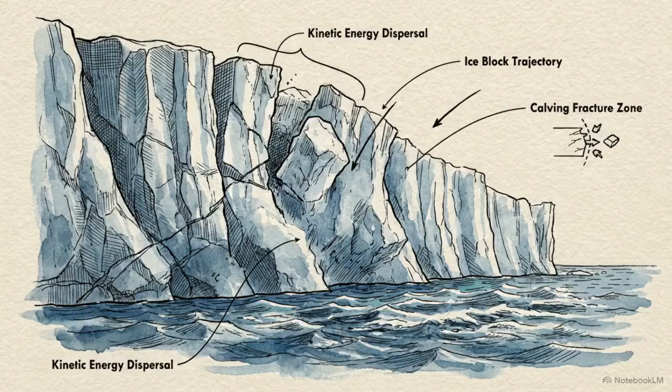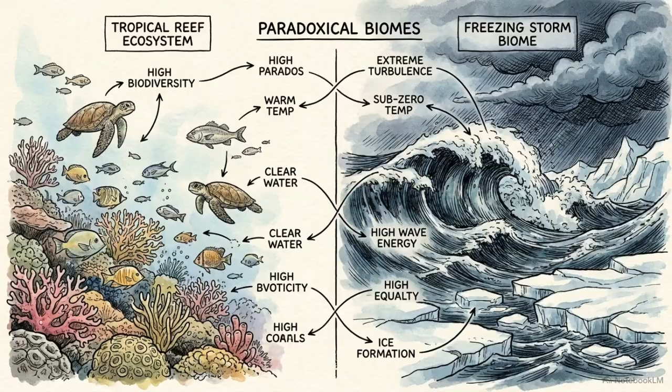The United Nations has laid out two massive scientific mandates: the Decade of Ocean Science and the Decade of Action for Cryospheric Sciences. Achieving these global goals presents a significant physical paradox.

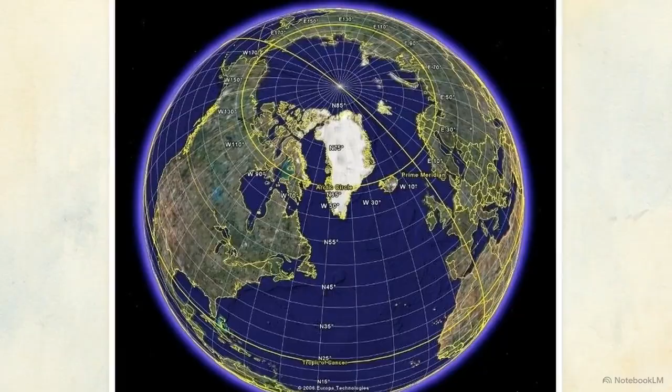To protect the Earth's most critical ecosystems, humans have to act in environments where survival is virtually impossible. We have to collect data beneath miles of polar sea ice, intervene in deep water high current zones, and maintain remote offshore energy sites. Because we cannot send humans into these extremes, we rely on marine robotics, remotely operated vehicles, and autonomous floats to act as our physical proxies.

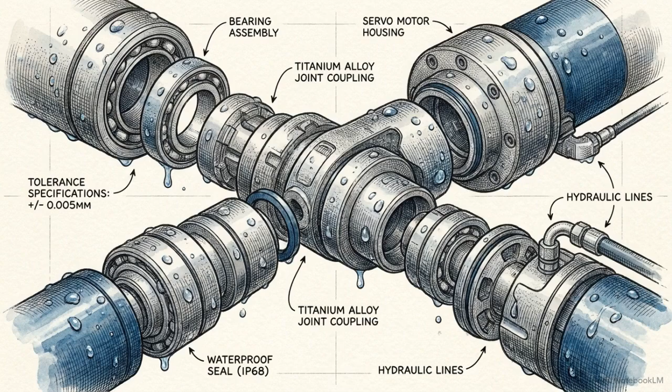To understand how this translation from policy to hardware occurs, we can look at the request for proposals issued for the 2026 MATE ROV Ranger competition. We are going to deconstruct how macro-level UN directives are broken down into four specific, localized engineering constraints. The survival of these mandates rests on hyper-specific mechanical and systems engineering solutions.

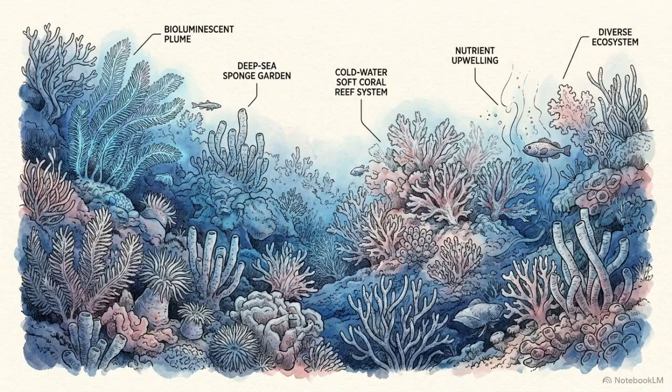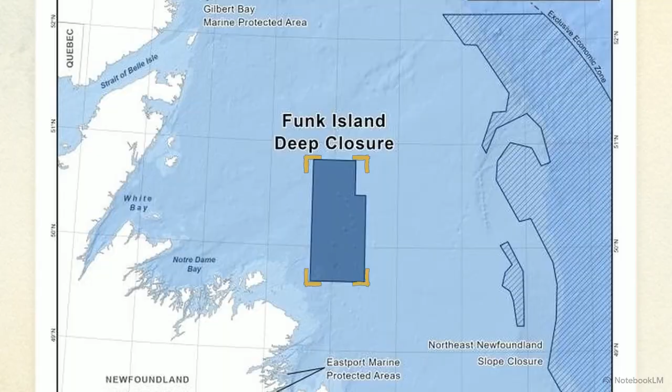The first major UN objective is to protect deep-sea biodiversity and restore delicate marine ecosystems. This chart shows the Funk Island Deep Marine Refuge, located off the eastern coast of Newfoundland. This is a primary testing ground for these observation efforts. Recently, researchers operating in this sector discovered a densely populated, rare, cold-water soft coral garden.

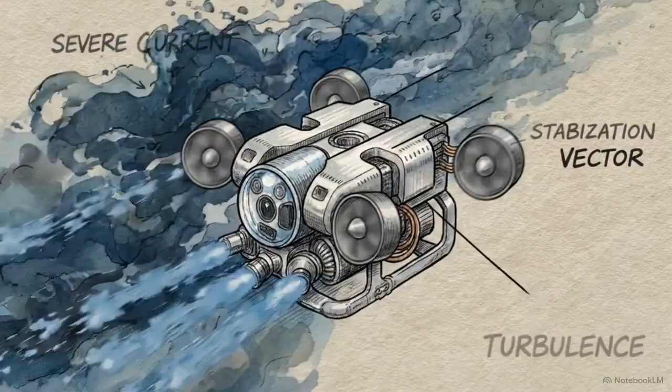To document a habitat like this without physically destroying it, an ROV must carefully operate inside the severe, sweeping currents that naturally run along the seafloor ridge. The mission demands the ROV use a specific data acquisition method known as photogrammetry.

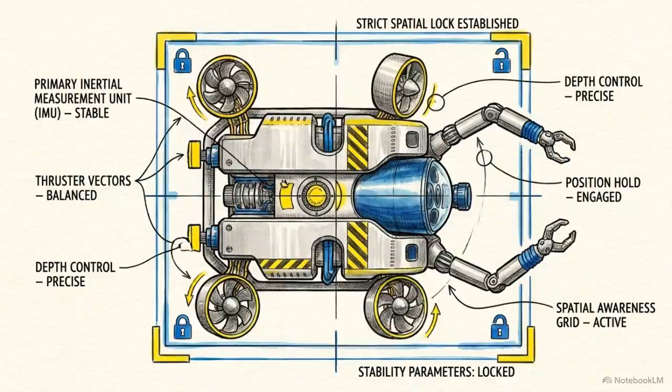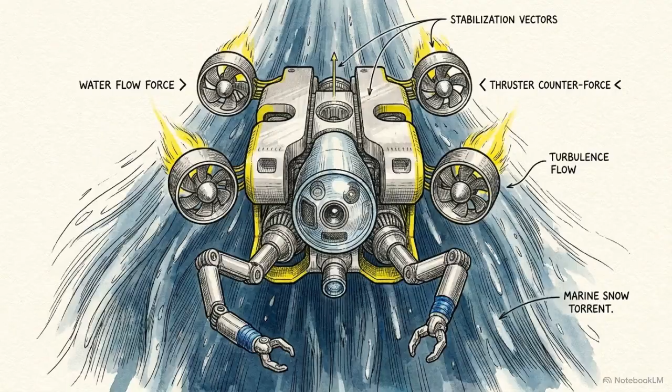By systematically capturing overlapping two-dimensional photographs, the ROV provides the exact data points required for software to stitch together an accurate, measurable three-dimensional topographic model. To execute this, the ROV pilot must maintain strict spatial awareness, holding precise vehicle positioning and flying linear transects directly against the water flow. Mapping these gardens in three dimensions requires robotic platforms stable enough to operate in heavy flow, turning discovery into measurable, long-term monitoring data.

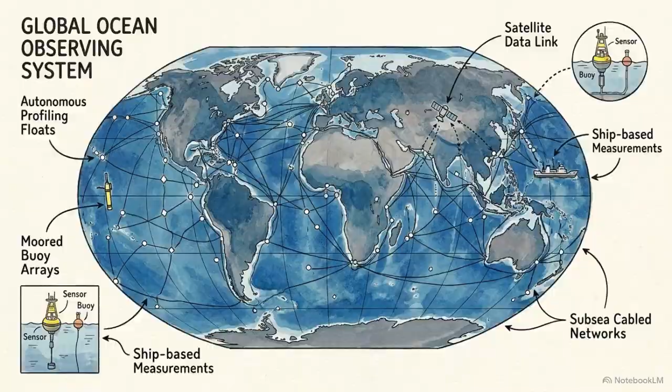The next UN objective mandates the expansion of the Global Ocean Observing System through persistent coastal monitoring initiatives. We can see this in action through the Smart Atlantic Alliance, specifically their subsea observatory linked via fiber optic cable near the Holyrood Marine Base.

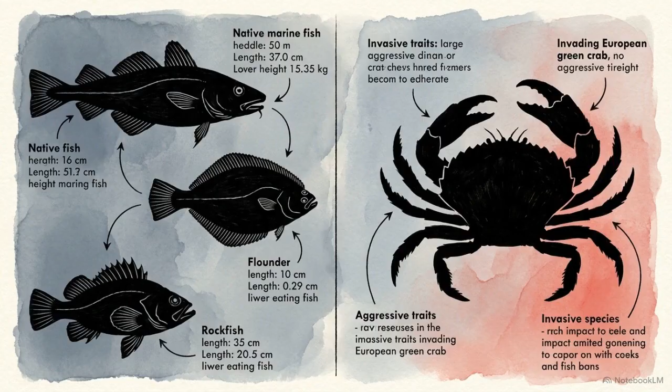One of the immediate biological challenges in this observation sector is tracking invasive species, like the European green crab, without having to rely on physical capture traps. The hardware solution the ROV must deploy is an environmental DNA, or eDNA sensor, which sequences cellular fragments shed directly into the water column.

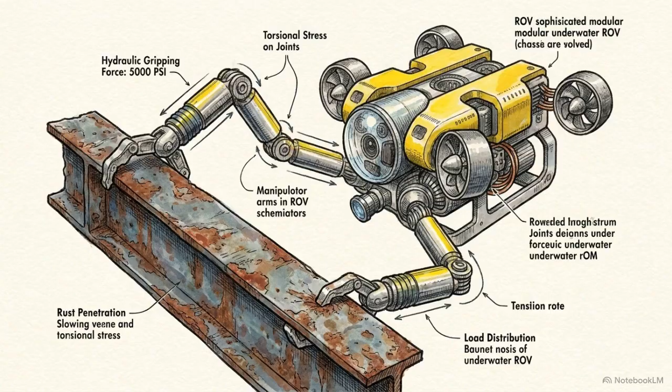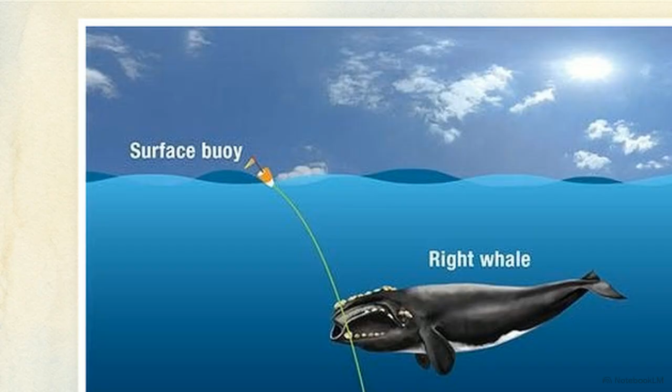In the exact same region, the ROV is required to execute heavy physical interventions, such as protecting the critically endangered North Atlantic right whale from entanglement in vertical fishing lines. The mechanical solution to this hazard is a bottom-stowed trap using a ropeless acoustic release. The ROV simulates the precise acoustic signal to trigger the buoy release, then executes a high-torque recovery to haul the trap to the surface.

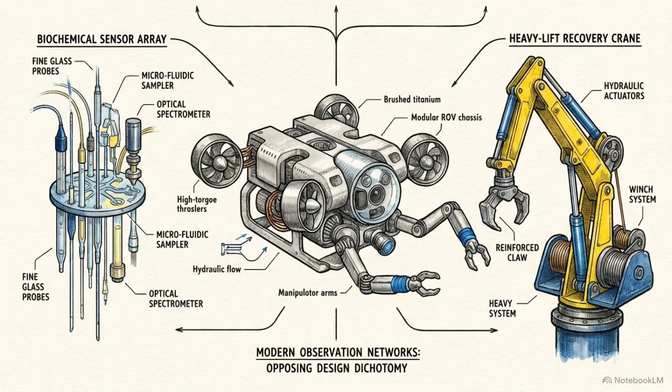Modern underwater observation networks force vehicle design into two opposing directions on a single dive. The ROV must operate as a delicate biochemical sampling tool and a heavy lift recovery crane.

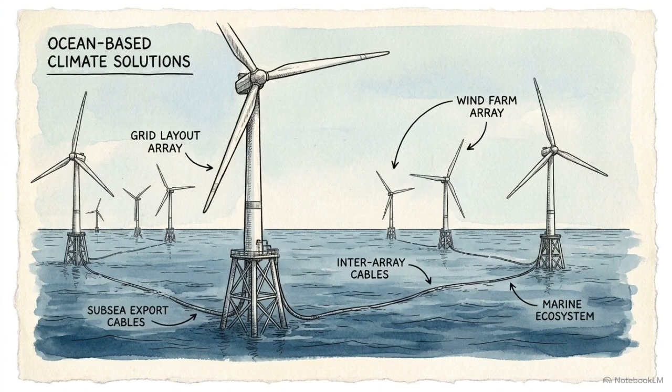Scaling up ocean-based solutions to climate change requires rethinking offshore energy infrastructure to create a sustainable ocean economy. Equinor's Hywind Tampen is the first floating wind farm engineered to power offshore oil and gas installations with renewable electricity. Mooring these massive floating structures in deep water introduces a difficult subsea construction challenge.

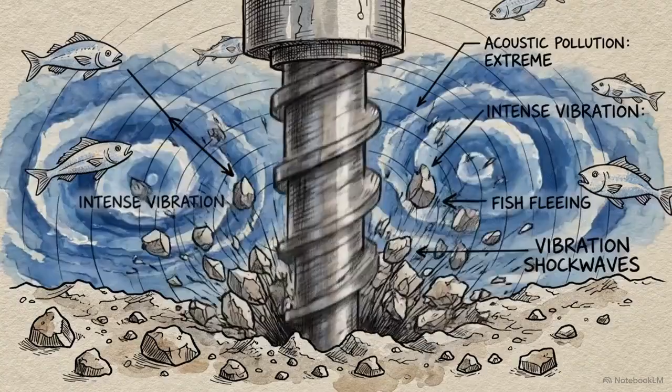Industrial anchors, known as micropiles, must be driven directly into the seafloor. The drilling process required to seat these micropiles generates intense acoustic pollution that actively harms surrounding marine life. To meet environmental regulations, contractors utilize a mitigation technology known as a bubble curtain.

Compressed air is pumped into a ring-shaped hose surrounding the drill site. The resulting vertical wall of bubbles physically absorbs and dampens the sound waves radiating from the machinery.

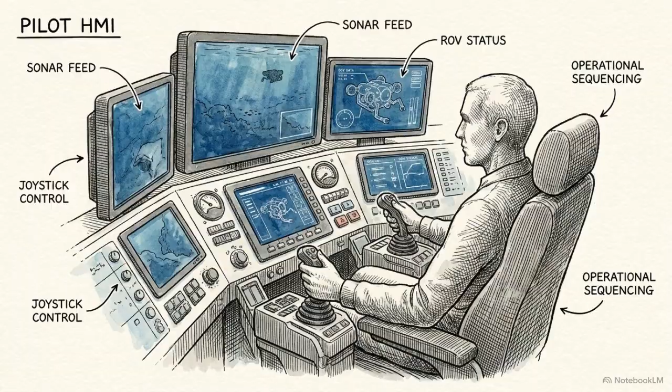This creates a complex operational sequence for the ROV. It must lay the bubble curtain array, install the micropile anchor, and then precisely route heavy power cables between the wind farm's subsea station and the oil platform's input port.

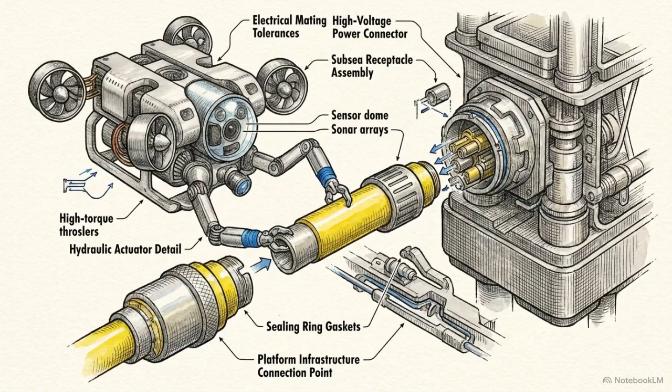Achieving a sustainable hybrid energy grid relies on subsea robots capable of building heavy infrastructure while simultaneously deploying the systems required to mitigate the environmental impact of their own construction.

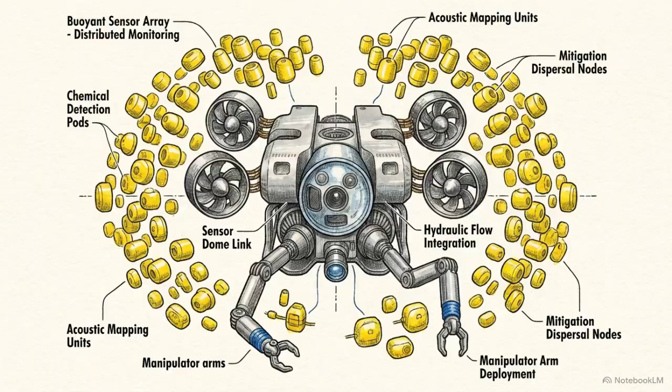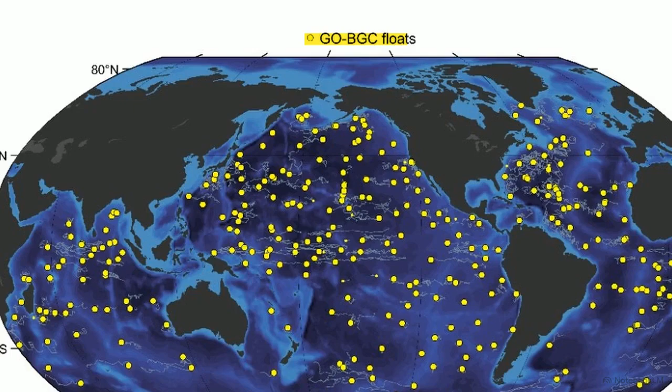Our final mandate focuses on unlocking climate solutions through continuous observation of the cryosphere, the Earth's frozen regions. This map details the deployment of the GO-BGC project, a global network of 500 autonomous profiling floats designed to track long-term ocean chemistry. In polar regions, these robots face a fatal mechanical threat.

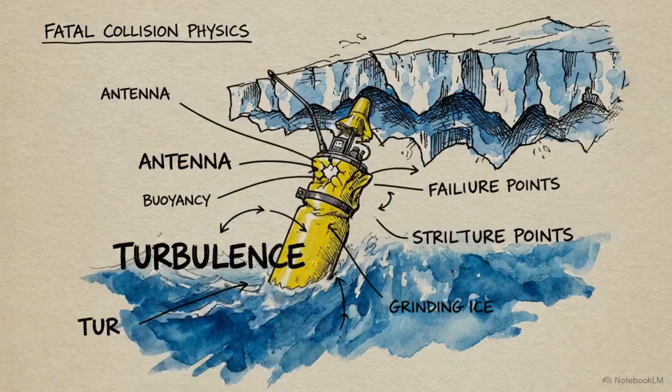If a float ascends beneath shifting sea ice, it will be crushed or trapped. To survive, the system requires a software adaptation, ice avoidance capabilities driven entirely by sensor data, without any human input.

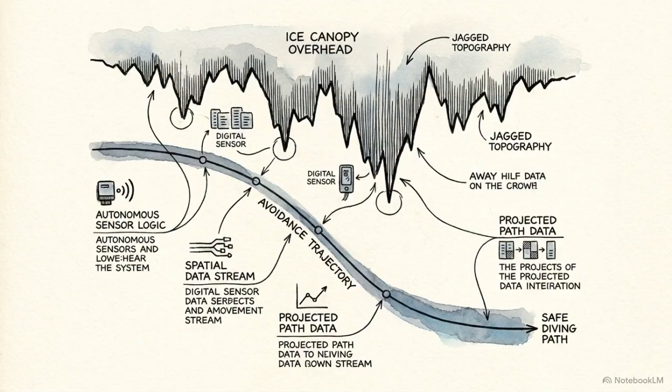As the float rises, sensors measure water temperature. If data indicates an ice canopy overhead, the float aborts its ascent and dives. Unable to transmit underwater, it locks collected data into internal storage across multiple profiles until it detects open water.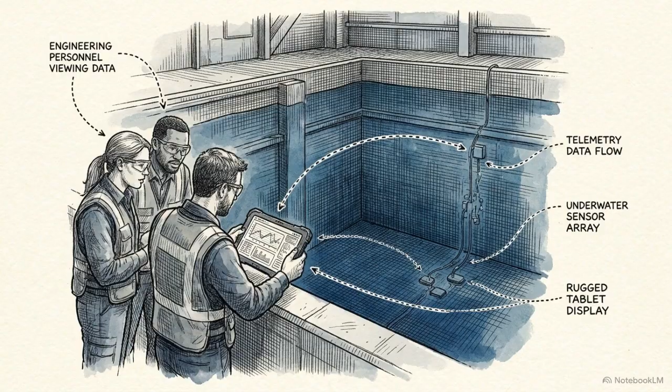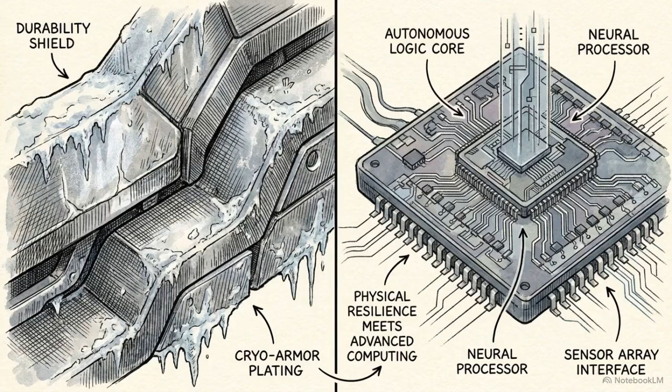The MATE Ranger competition simulates this constraint directly. Teams must engineer a float that descends to a specific depth, holds autonomously under the ice, and delays data until recovered. Operating in the cryosphere demands an integration of physical durability and autonomous logic. The vehicle must be robust enough to survive the cold, but intelligent enough to avoid the ice altogether.

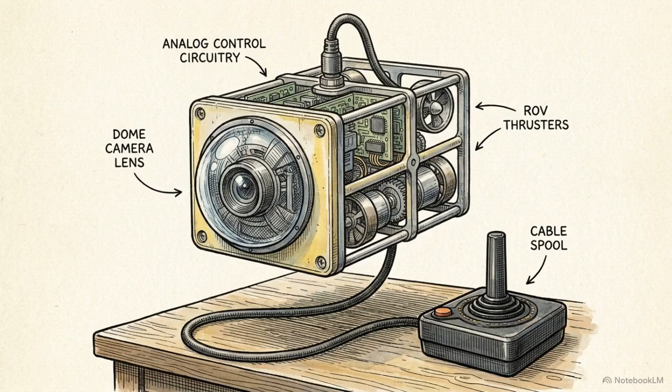When we pull back from these individual operational tasks, we have to look at the remotely operated vehicle as a complete, unified system. Historically, an ROV was effectively a waterproof camera attached to a joystick. The mandates required by the 2026 directives demand something more complex. Today's vehicle is a massive, multidisciplinary systems engineering challenge.

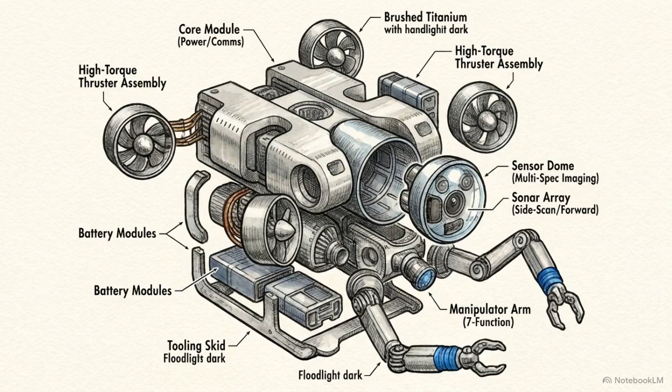On a single deployment, the machine is expected to act as a topographical surveyor, a genetic chemist, an offshore construction worker, and an algorithmic decision-maker.

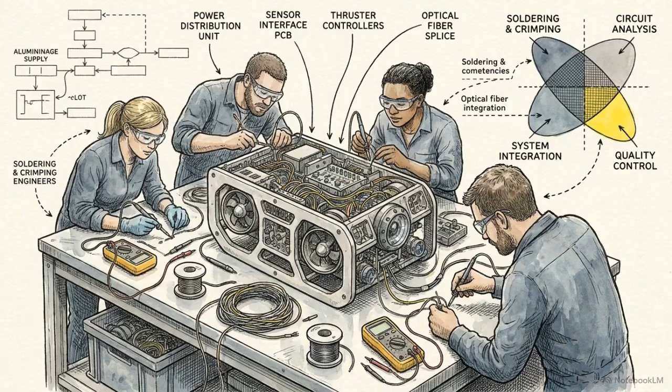These intense hardware constraints transfer directly onto the human operators. Designing, budgeting, and piloting these machines requires a vast overlapping matrix of technical competencies and organizational skills. The engineering constraints of the Ranger class force teams to develop the technical and operational fluencies required to execute environmental policy on a global scale.

The United Nations mandates have provided the global objectives required to protect the ocean and the cryosphere. It is the next generation of engineers that will actually push the robotic performance to achieve them.